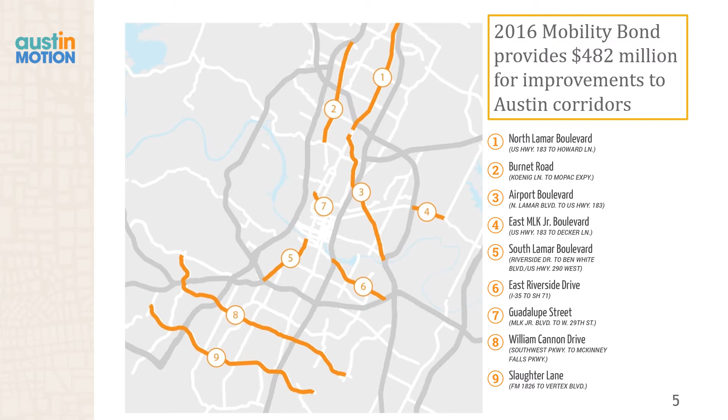To give some background, in 2016, Austin voters passed the 2016 Mobility Bond, which provides $482 million for transportation improvements throughout the city of Austin. As part of the Corridor Mobility Program, a large portion of bond funds is being used to design and construct multimodal improvements on 9 major Austin roadways.

The purpose of this specific project is to address safety and mobility concerns along North Lamar Boulevard from US 183 to Howard Lane. Over 37,500 vehicles travel this major Austin roadway per day, and along the 6-mile corridor, there are no bicycle facilities. There are also significant gaps in pedestrian facilities along the roadway.

Another safety concern is the number of conflicts that could occur at more than 300 access points and driveways along the corridor. Additionally, North Lamar pedestrians, bicyclists, and drivers often must travel long distances between safe roadway crossings, increasing potential accidents related to traffic crossing.

According to crash data collected by Austin Transportation, there were over 3,900 crashes in the North Lamar Boulevard corridor between 2015 and 2020. Those crashes resulted in 380 fatalities or injuries, and 71 of the crashes involved pedestrians or bicyclists.

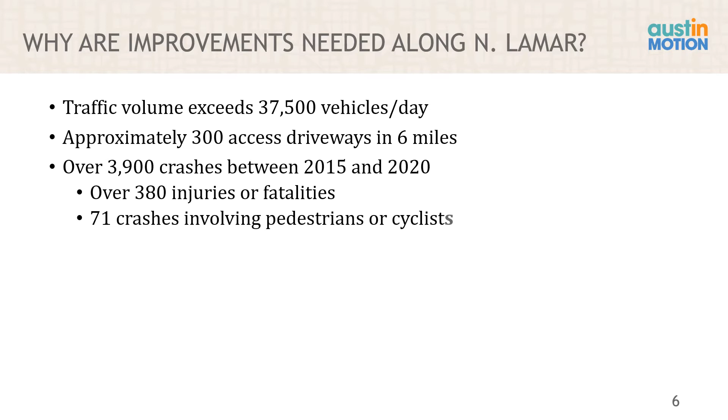North Lamar Boulevard between US 183 and Howard Lane is one of the 9 major roadways identified in the Corridor Construction Program, which is funded through the 2016 Mobility Bond and is part of the Corridor Mobility Program. The City of Austin conducted an environmental analysis to understand the potential impacts of the proposed mobility, safety, and connectivity improvements for the North Lamar Boulevard corridor.

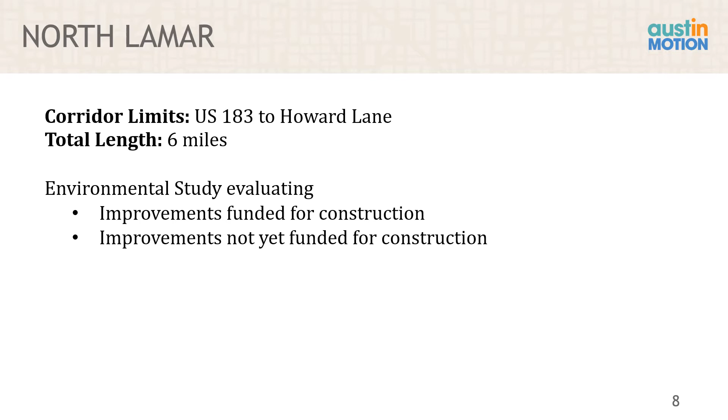The analysis was conducted per the National Environmental Policy Act, or NEPA, because the corridor is owned and maintained by TxDOT. The existing North Lamar Boulevard corridor consists of 2 11-foot travel lanes with no shoulders in each direction. The travel lanes are separated by a 12-foot center turn lane, and the travel lanes are lined by 5-foot sidewalks, which are set back from the curb at varying distances ranging from 5 to 18 feet. Though it varies by section, the existing right-of-way width is generally 100 feet along North Lamar Boulevard.

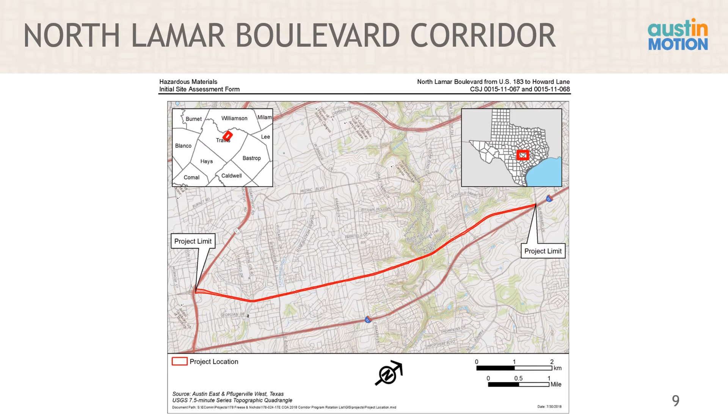Proposed improvements will be funded in part by the voter-approved 2016 Mobility Bond and are expected to improve mobility, safety, and connectivity along the 6-mile North Lamar corridor for all users, whether they walk, bike, drive, or take transit. The funded improvements include 12 traffic signal improvements with enhanced technology, 3 new traffic signals, and 3 new pedestrian hybrid beacons. Additionally, safety and multimodal connectivity improvements will be brought to all North Lamar intersections.

Plans also include 12 miles of new shared-use paths to create continuous ADA-compliant sidewalk and bicycle facilities. 6 miles of pavement rehabilitation is expected to occur as part of the funded improvement plans, along with drainage improvements, some driveway modifications, and bus stop improvements.

Intermittent raised median islands between Rundberg Lane and Braker Lane are also planned as part of the funded North Lamar corridor improvements. The city has also evaluated the environmental impacts of additional improvements that represent the ultimate corridor vision but are not yet funded for construction.

These improvements would include enhanced and separated pedestrian and bicycle facilities, streetscape, trees, intermittently raised medians, and street lighting along the length of the corridor between US 183 and Howard Lane I-35.

For the ultimate corridor vision, which includes unfunded improvements, the proposed right-of-way width following widening would be approximately 120 feet. It should be noted that the near-term funded improvements would require less right-of-way, with right-of-way needs generally limited to areas with less than 100 feet of existing right-of-way width and at major intersections with turn lanes.

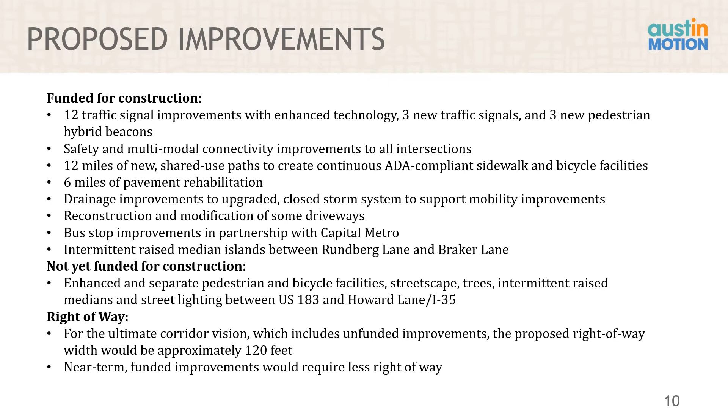The next few slides show typical cross-sections which provide a preview of what the proposed funded and unfunded improvements would look like. The first typical shows planned improvements that are funded for North Lamar between US 183 and Rundberg Lane, which includes mill and overlay to improve road surface conditions, road and crosswalk restriping, signal improvements, transit improvements, and the addition of behind-the-curb bike and pedestrian facilities.

Separate behind-the-curb bike and pedestrian paths will be included in areas with existing sidewalk and enough right-of-way for a separate bike path. In areas where space is constrained, a 9-foot shared-use path will be installed behind the curb. Since this section is not expected to include drainage improvements, this section is expected to begin construction in the early half of 2021.

This second typical shows planned improvements that are funded for North Lamar between Rundberg Lane and Braker Lane, which includes some roadway reconstruction for storm drainage infrastructure, mill and overlay to improve road surface conditions, road and crosswalk restriping, drainage improvements, signal improvements, transit improvements, intermittent raised median islands, and the addition of a continuous 9-foot shared-use path installed behind the curb.

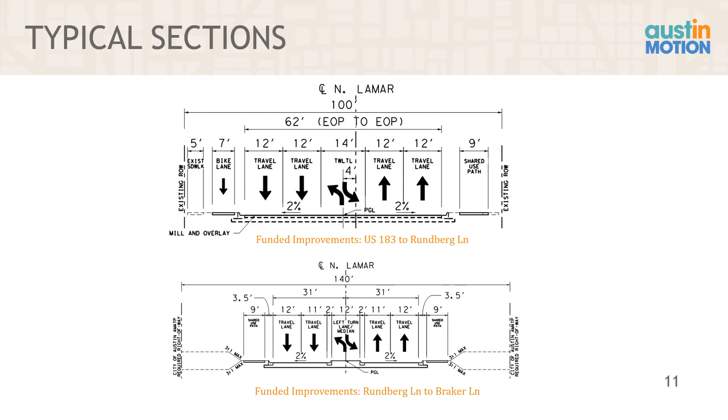This section is to undergo mill and overlay and restriping under a separate TxDOT project, so the corridor program's funded improvements will primarily focus on crosswalk restriping, minor drainage improvements, signal improvements, transit improvements, and the addition of a continuous 8-foot shared use path installed behind the curb. This section is expected to begin construction near the end of 2021.

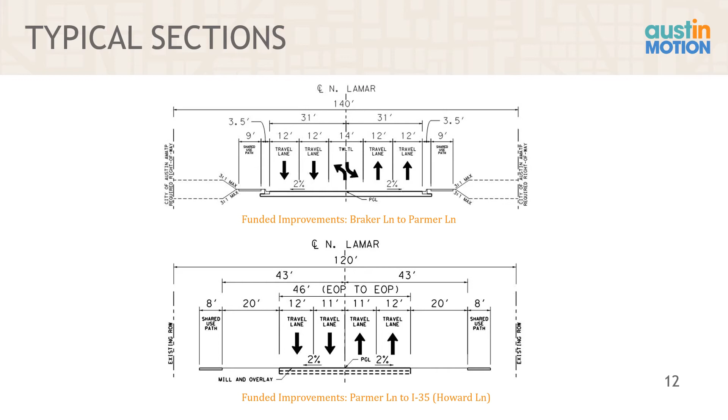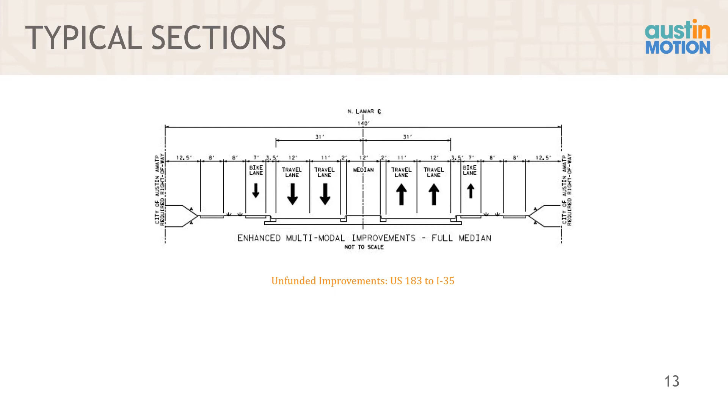Finally, we show here the typical cross-section of the ultimate corridor vision, which includes unfunded improvements. These improvements would include enhanced and separated pedestrian and bicycle facilities, streetscape, trees, intermittently raised medians, and street lighting along the length of the corridor between US 183 and Howard Lane I-35.

I will now review the environmental studies completed for the proposed project. As part of the project's compliance with NEPA, air quality, historical resources, hazardous materials, water resources, biological resources, archaeological resources, and social and community impacts within the corridor were assessed.

Overall, impacts to environmental resources would be minimal. Throughout the development of these improvements, the city worked to reduce and minimize impacts.

The project contains suitable habitat for 27 federally and state-listed threatened and endangered species, as well as species of greatest conservation need. Early coordination with Texas Parks and Wildlife would be required.

Previously unknown karst features or caves may be encountered during excavation. Any karst features encountered during bedrock excavation in karst zones 1, 2, and 3 will be evaluated for the presence of karst invertebrate habitat and the potential biological significance of the void to the extent feasible. If a potential karst void is encountered during excavation, work within 50 feet of the feature will cease until an evaluation is completed per current U.S. Fish and Wildlife Karst Survey guidelines.

The following best management practices, or BMPs, would be implemented to minimize biological impacts per TxDOT's 2013 Memorandum of Understanding, or MOU, with Texas Parks and Wildlife: plains spotted skunk BMPs, bird BMPs, terrestrial reptile BMPs for the Texas garter snake, and vegetation BMPs.

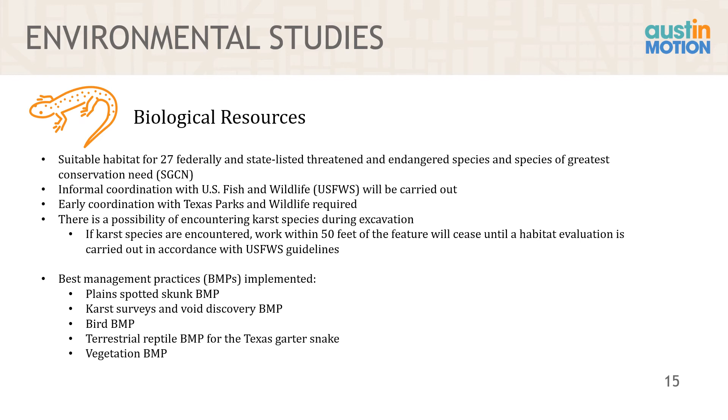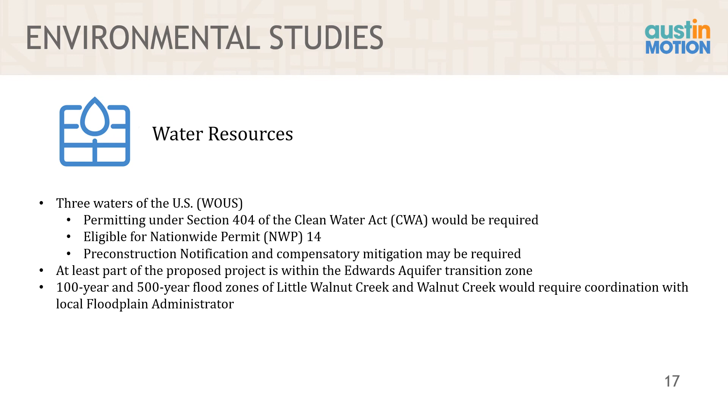At least part of the proposed project is within the Edwards Aquifer Transition Zone, and the proposed project is located within the 100-year and 500-year flood zones of Little Walnut Creek and Walnut Creek, where North Lamar Boulevard crosses these streams. Coordination with the local floodplain administrator will be required.

With regards to the project schedule and timeline, we anticipate that this project will receive environmental clearance by August 2020. Funded improvements are undergoing final design. Construction of the improvements that would be funded by the 2016 Mobility Bond would be phased as much as possible to minimize overlap and impact.

Plans for the unfunded improvements, which reflect the ultimate corridor vision, are not yet finalized. The final design plans and construction start dates for unfunded improvements are to be determined and are dependent upon funding availability. Once plans are finalized for the funded corridor improvements, the bulk of this project work is expected to be constructed from 2021 through 2024.

To mitigate construction impacts, funded improvements to North Lamar Boulevard will be phased and sequenced by segment within the 4-year timeframe, beginning in 2021.